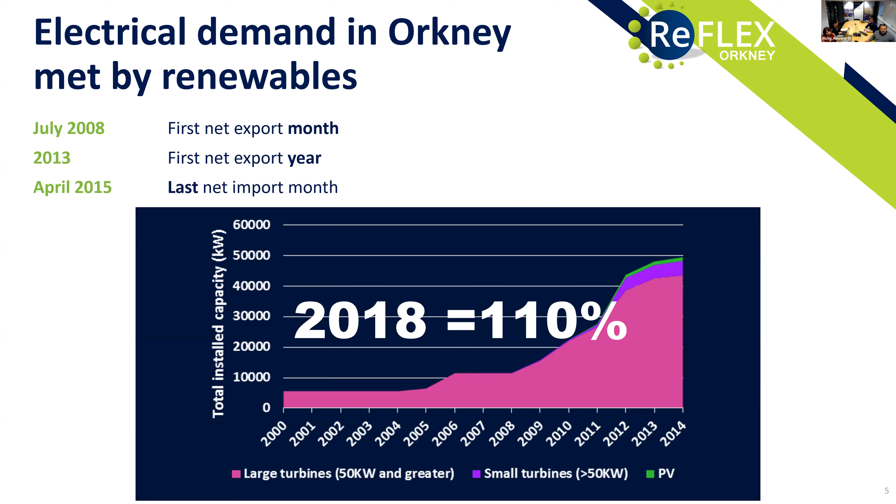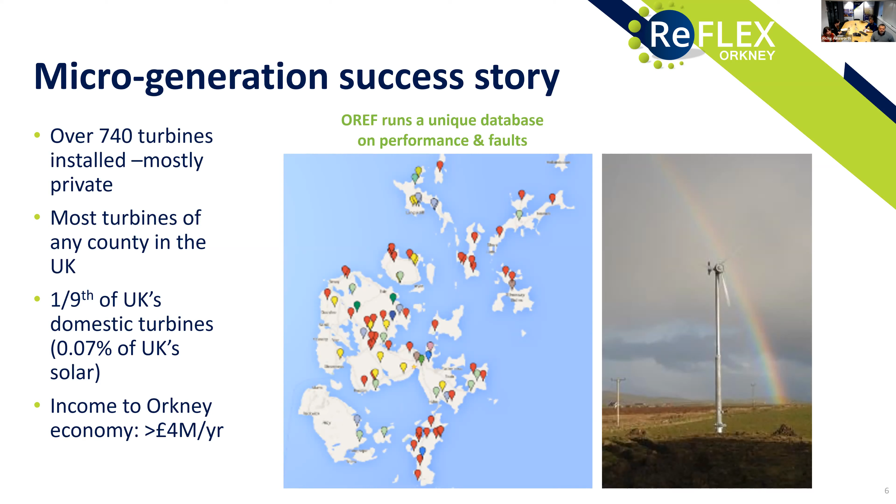But this journey has not just been about big-scale wind, it's also involved small-scale wind. Over the last 10 years, we've had 740 micro wind turbines installed across the islands. And this is mainly on the basis of a feed-in tariff regime which existed in the early part of the last decade. And not only has this given us renewable energy to households and farms, it's also given us income into the community as well.

As well as generating energy, we also use energy in imaginative ways, and the adoption of electric vehicles is one example. We now have over 220 vehicles in the county. We also have buses and other infrastructure associated with that. And this influx of electric vehicles has allowed us to gather data from that community to see how they're used and to think about how we could further decarbonise vehicle transport in the future. Again, we'll come back to that when we talk about ReFLEX.

Some interesting statistics there is that a vehicle in Orkney on average travels about 24 miles a day, and the average speed is around 30 miles per hour when the cars are in use, which takes about 1 hour per day.

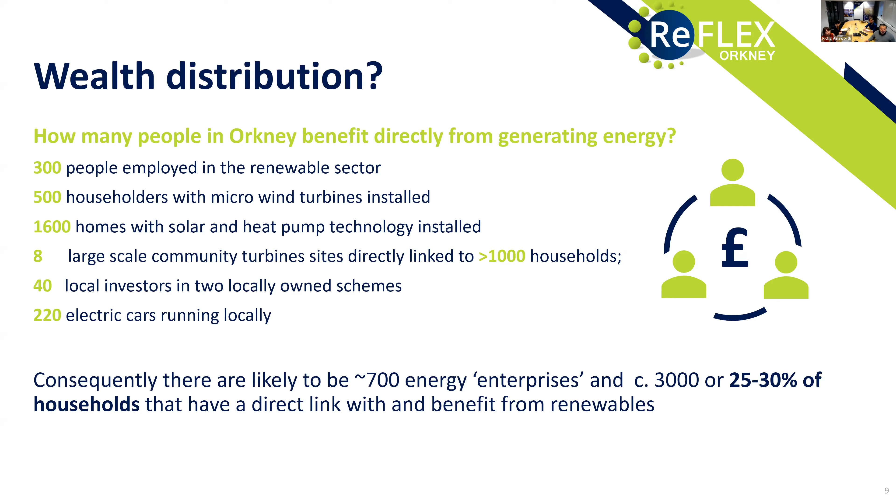So within any community, there's an important question about who benefits from these initiatives. And from the outset, Orkney has been very keen to make sure that as many people as possible benefit from the renewable energy revolution that's going on. What you can see here are some of the numbers that indicate how people are involved. Some people might have jobs, some people might be hosts to technology, others might be investors in schemes. But overall, we think that around 3,000 of our 10,000 households have a direct link and benefit from renewables, and that's about 25 to 30% of those households.

interestingly, that tomorrow for the UK is exactly what Orkney looks like now. Because we have 100% of our electricity coming from renewable energy, you can see here that when the wind blows strongly, we generate a tremendous amount of energy. And then when that goes away, we need to have solutions that allow for that demand to be met in the periods of less generation. So effectively, we're a living laboratory in Orkney for what the future energy system might look like.

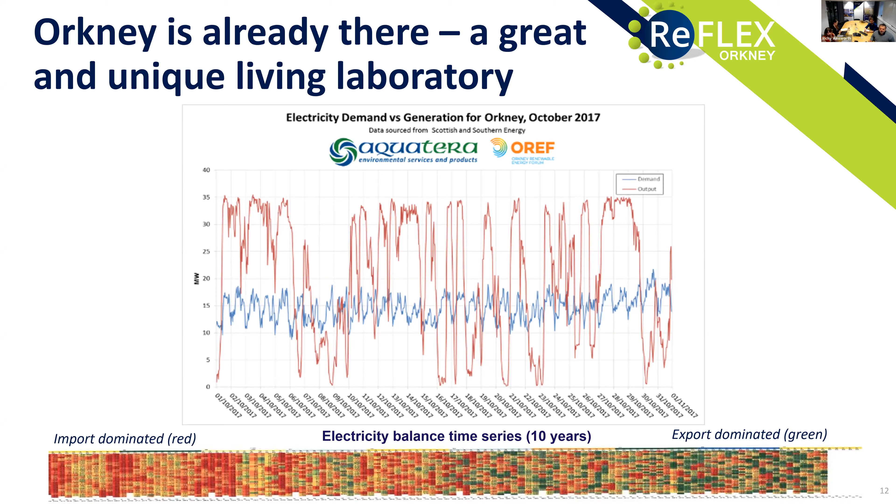And the transition that we've gone on over the last 10 years can be seen at the bottom. Now, if you look at this graph, which shows on any particular day whether we've imported energy in red or exported electricity in green, what you can see is that over the 10 years, we've moved from an import-dominated situation to an export-dominated situation.

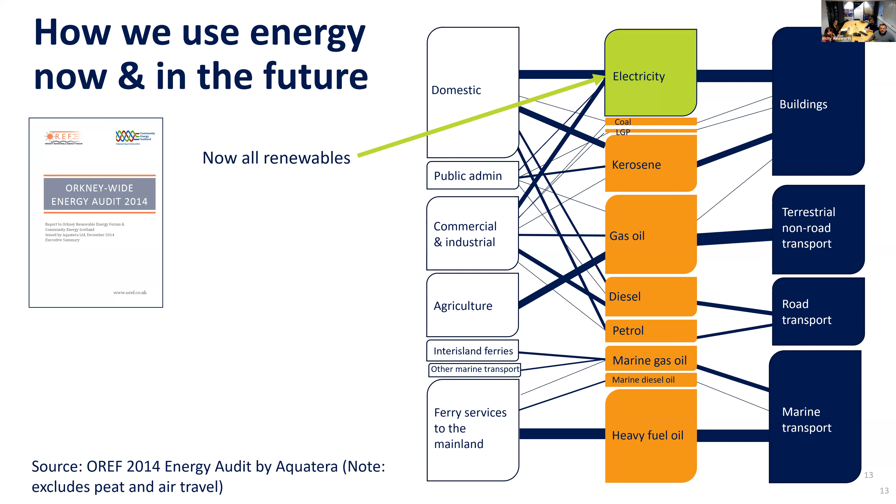So effectively, what we've talked about there is the decarbonisation of electricity. But this Sankey diagram shows in proportion our whole energy stack. And what you can see is that electricity is only about 15 to 20% of our total energy demand. So our huge challenge now is to decarbonize the rest of this stack through further electrification, through the adoption of hydrogen and synthetic fuels and other solutions.

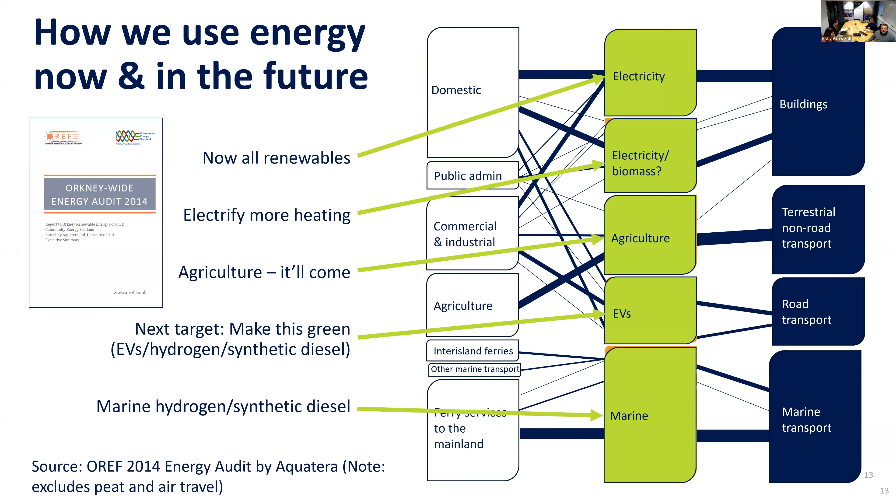So what we're going to be talking about for a lot of this presentation is how we're going about decarbonizing these other aspects of our energy system. And underpinning that is also the timeline, the target of when we're going to achieve that. So in the UK recently, we've had the government announce that they want to have a carbon neutral situation by 2050. In Scotland, the government has suggested that they want to be carbon neutral by 2045.

But the challenge for all of these targets is that somewhere needs to go first. We need a community that can adopt decarbonisation and then show others how to do that. And so Orkney is setting itself up to achieve this target of carbon neutral by 2030. And that's an important stepping stone then for other communities to follow. And this isn't just electricity, this is the whole energy system.

So underpinning this drive is a project called ReFLEX. And this ReFLEX project aims to use digital capacity to link the renewable generation to flexible demand. And by increasing the flexibility in demand, it allows the peaks and troughs to be evened out and for variable renewable energy to meet and match that demand. And what we're going to be doing is replicating that system across different communities in an integrated way across electricity, transport and heat.

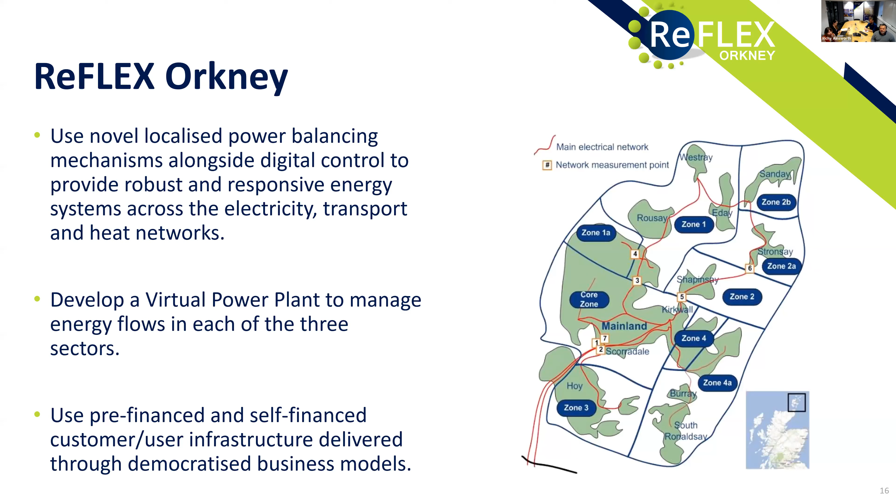So within Orkney, we have long had constrained energy generation because of the weakness of our grid system. And so these localized power balancing mechanisms will help us control that. At the heart of it is a virtual power plant, which Liam's going to speak to next. And another important part of this system is that the technology is going to be pre-financed so that the customer can rent or lease technology rather than having to buy technology.

And the team involved in that includes a number of the businesses that are here today, organizations that are here today. So we've got EMEC, Solo, Aquatera, and Orkney Islands Council, but also Community Energy Scotland, Heriot-Watt University, and Doosan, the Korean engineering company. And these organizations are then supported by others and associated partners helping make the ReFLEX team.

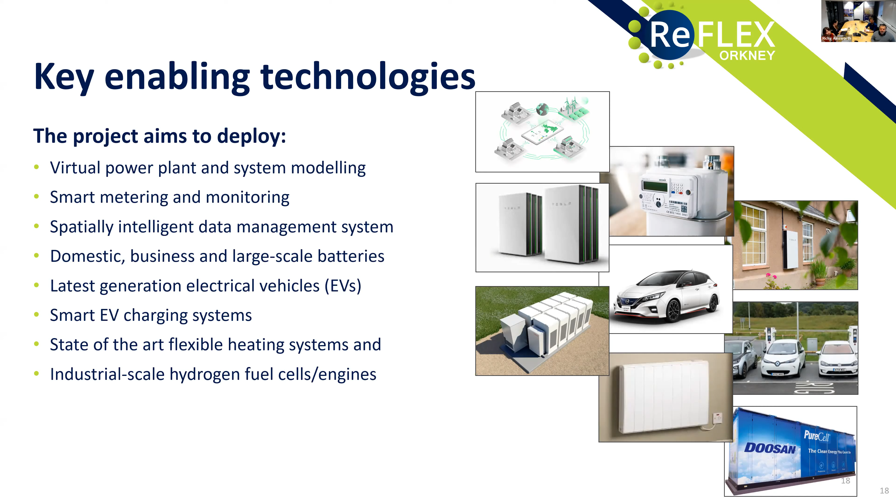So the key enabling technologies that we're going to deliver are the virtual power plant. Again, Liam will speak a bit more about this with the smart metering and monitoring. We're also going to be looking at domestic, business and large scale batteries. We're going to be looking to lease and provide for rental electric vehicles. We're going to have smart charging systems associated with that, flexible state-of-the-art heating systems, and industrial scale hydrogen fuel cells and engines. So I'll pass on to Liam to explain a bit more about the details.

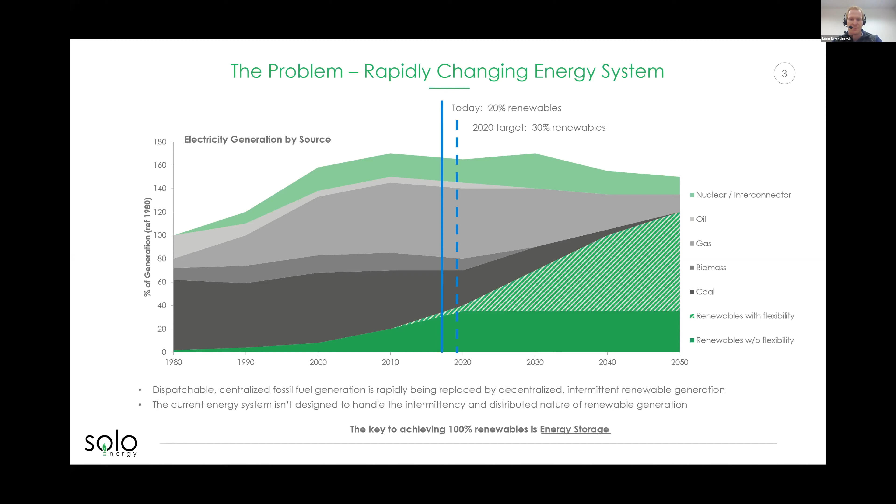And what we're doing in the ReFLEX project is addressing that flexibility and storage element across three vectors of the energy system. So that's power, transport, and heat. So the ReFLEX customer offer, the offer to the end consumer, whether they be residential or commercial premises or business, incorporates a power element in terms of 100% renewable local energy supply, a low-cost EV leasing model to address the transport network, and renewable heating retrofits to address the heat side of things.

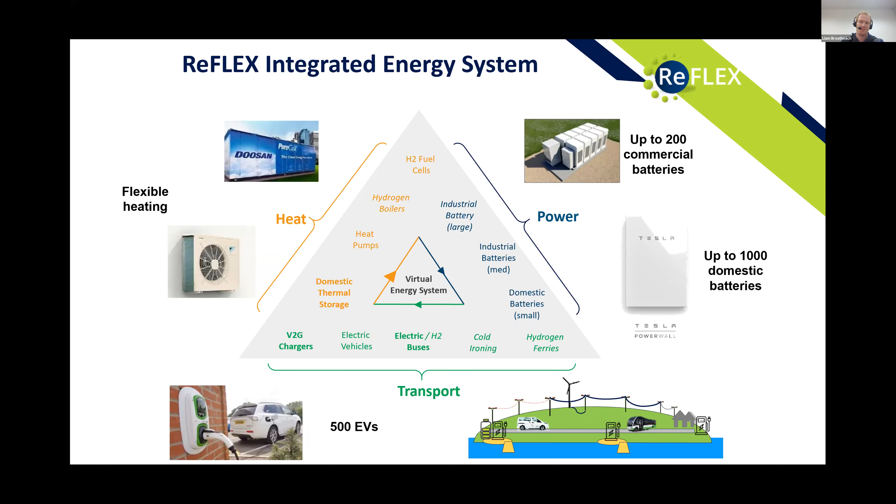And where do Solo as a company come into this? So our model is effectively to offer customers batteries, EV chargers, and other flexibility assets installed in their homes for free at no upfront cost to them. We control those assets to optimize their behavior and deliver benefits to the end consumer, to the grid, to the system operators of the grid, and also to energy suppliers.

And we do that by operating those systems as a virtual power plant. So effectively, we take a large number of small distributed assets and operate them together to mimic what a traditional power plant would have done. And that gives us a lot of flexibility in terms of how we operate.

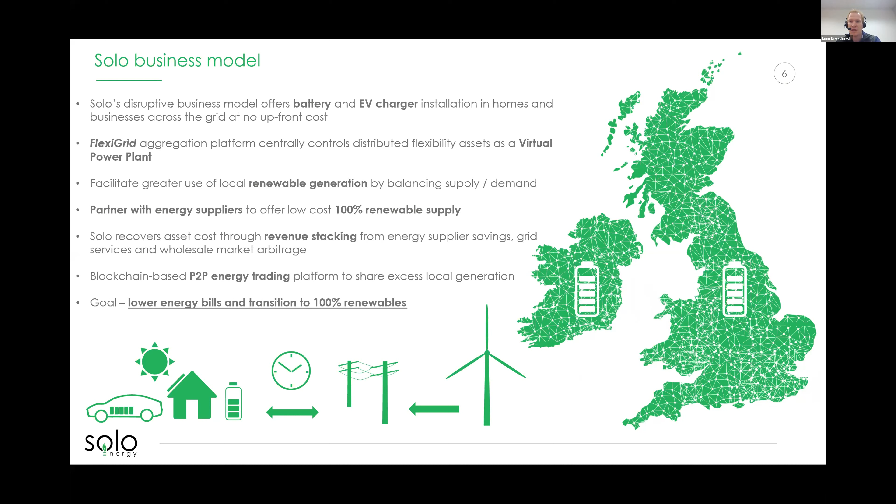The reason why we do this is to facilitate greater use of local renewable generation, to help balance supply and demand on the grid, and obviously to deliver benefits in terms of savings to the end consumer. So as I mentioned, we partner with energy suppliers to offer that 100% renewable supply, and we recover the cost of the assets that we financed through revenue stacking. So we access various different markets, such as balancing services to system operators, such as reducing peak charges for consumers.

So this is what our USP is. It's our FlexiGrid platform. Essentially, it's a cloud-based platform that controls multiple assets across the grid. So it brings back data from each site, and that data can be from an electric vehicle charger, for example, a residential battery, a commercial battery, or a heat pump. Brings it up into the cloud. We undertake some data analytics.

We take in various different signals, whether they be from system operators or even weather forecasts, for example, and we determine how to optimally operate that asset. And then we push out control signals to each of those sites. And the control signals can be as simple as, for example, charge a battery now, or stop charging your EV. But the key point is that there's a great degree of optionality in having so many assets of different types within the virtual power plant.

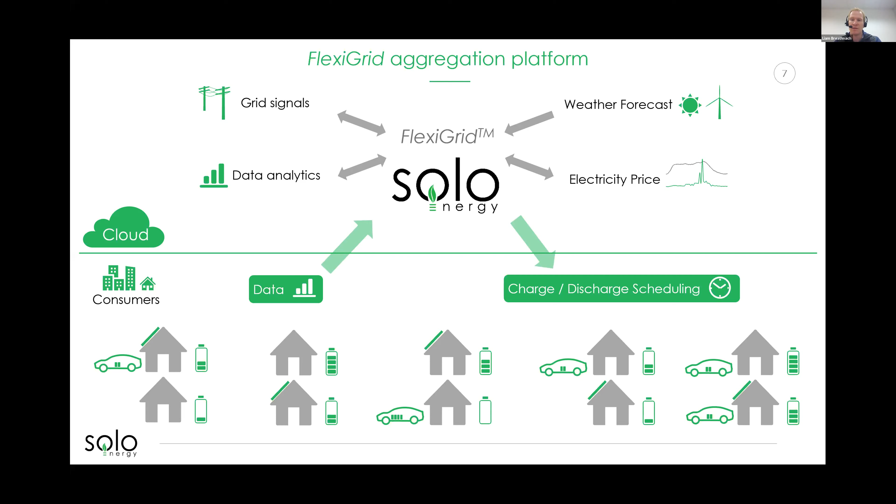The wholesale electricity price tends to follow that pattern, so it's generally low during nighttime when demand is low, and then we see a nice spike in the evening. That spike is generally driven by the fact that balancing costs are higher, but also you're bringing on more and more generation, and that generation you're bringing on tends to be of reduced efficiency, so it's costlier to run.

Traditionally, because demand couldn't be controlled, this has been a very one-way system. Price follows demand, but having the flexibility assets rolled out across the grid and control of those flexibility assets means there's an opportunity here. For example, let's say you charge a large number of batteries at off-peak times, you can potentially reduce demand on the system during those peak times.

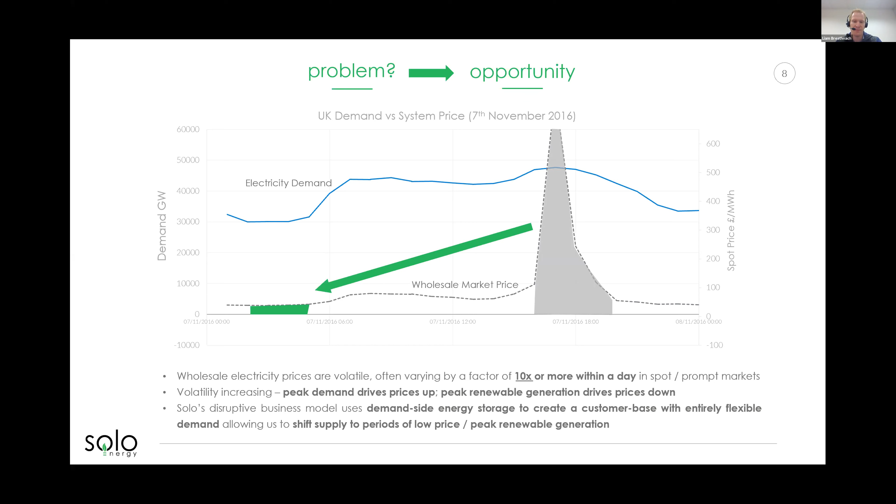We're also seeing some very interesting developments in recent years in the UK, but also in wider European markets, that we're seeing negative wholesale prices. So this generally occurs when you've a lot of generation, renewable generation on the system. So for example, it's a particularly windy day and you have a lot of wind on the system.

And why you might see a negative price is that it's actually costlier for a lot of the traditional generation plants to actually switch off. So they'll actually pay a certain figure to stay connected to the grid and producing, so they don't have to switch off the generation and come back on. And that absolutely presents a significant opportunity if you're controlling electric vehicle charging, or controlling batteries, for example, and other heating elements.

Wind and solar plays a significant role, obviously, in the variability of the system, but not even so much the actual total amount, but also forecast versus actual. So there's inherent uncertainty as we go to a greater degree of renewable generation on the system. And it's important to address that uncertainty with increasing flexibility on the system.

And so there's the traditional options where thermal generation plant have provided that flexibility to system operators, but now we're moving to a stage where every home, every business could have a flexibility asset within it. And it's the control of those assets that is a key enabler for an increased renewable generation across the system.

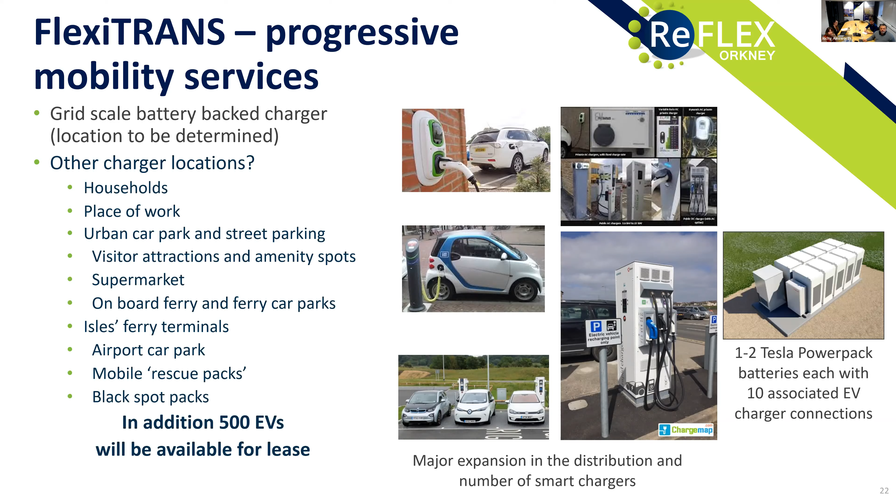So what I'm going to do now, I think, is hand over to Richie and Adele, who are going to talk a bit more about hydrogen, and then I'll come back and talk about how that links into the heating system in Orkney as well.

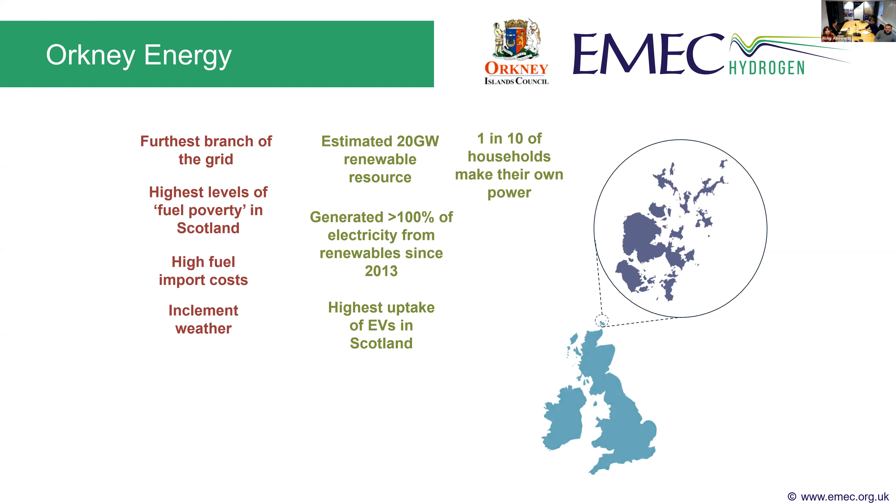In recent years, the Orkney Sustainable Energy Strategy has been launched, and personally, I find one of the most crucial things to the success story of Orkney is the community's engagement and the fact that everybody is able to get on board with this. A lot of people locally really understand their energy needs, and I just don't really see that in other areas. I guess that could be the same for other islanded nations that are tuning in as well. And we've got great organisations such as the Orkney Renewable Energy Forum, which gives the community a platform to raise their concerns and discuss all the issues so we can find solutions together.

Our main issue at the moment though is our export constraint. So even though we have this huge renewable resource surrounding us, we are limited in the amount of energy that we can get off Orkney or import if we were wanting to.

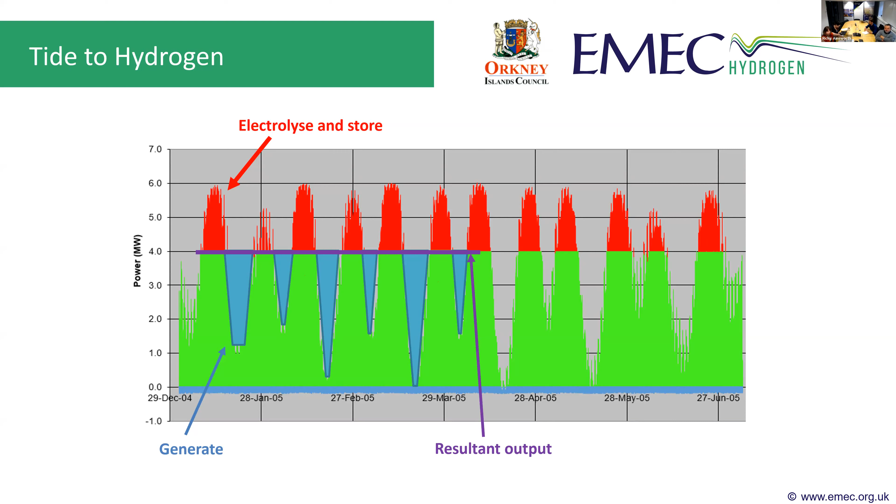So what had happened was we reached a point of saturation on the local grid, and there was a memorandum put in place that we were not able to install any more wind generation on Orkney. There was a piece of work done that generated the UK's first active network management system. This is a software system that essentially allowed an extra 20 megawatts of generation to be added to Orkney's grid, but it effectively allows generators to be told when to turn off. If we're going to be producing too much electricity, we can send them a signal and they're able to shut down. Unfortunately, those levels of curtailment are quite a bit higher than we've expected.

And the turbine that we're showing there, they actually experienced curtailment of 50 to 60% of times that it could be generating. This is obviously a loss of funds to the local community because they're losing their feed-in tariffs that they should be getting paid. But overall, it's just a waste of renewable energy that we could be capturing. So as well as the tidal energy on our site, we're also looking at capturing wind, turning that into green hydrogen, and finding uses for that. That led us over to the Surf and Turf project and collaborating with Adele and everybody else over at the council.

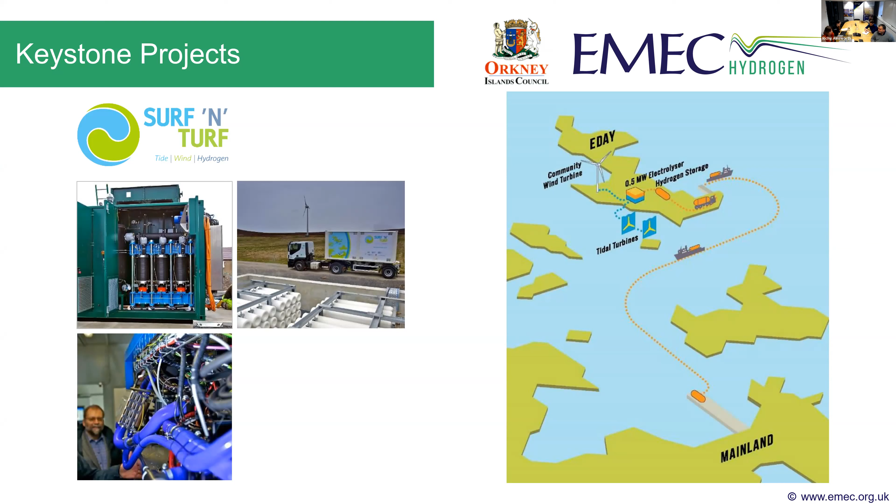And that project was funded by the Scottish Government to a roughly £3 million budget, so it's a significant investment for Orkney. And then building on the Surf and Turf project, we thought we could take that a little bit further. As well as using the hydrogen back for power, and I should say the power is used to power vessels here, ferries, when they are dockside. Previously they would have plugged into the grid, or they would have used fossil fuels to do that. So now we can use the hydrogen to generate the power for that, taking off a bit of the carbon from the system here.

Great. So basically the BIG HIT project, which is an EU funded project, roughly €7.5 million for Orkney as well, expanded on those principles. So we added a few more trailers. We also added a 1 megawatt electrolyser on the second island of Shapinsay. And again, that is a community wind turbine. Slightly lower rates of curtailment than Eday, but still, it can be anywhere from 15 to 40% on Shapinsay there.

As well as using the hydrogen for power generation, in the BIG HIT project, we use the hydrogen for transport. So you can see we have some vans down here, hydrogen electric vans that we have purchased as a local authority and integrated into our fleet. So we have transport, and then we've also added 30 kilowatts of hydrogen catalytic boilers into a local primary school. So that neatly starts to demonstrate the heat, the power, and the transport aspects that hydrogen can address. So it's kind of like Surf and Turf 2.

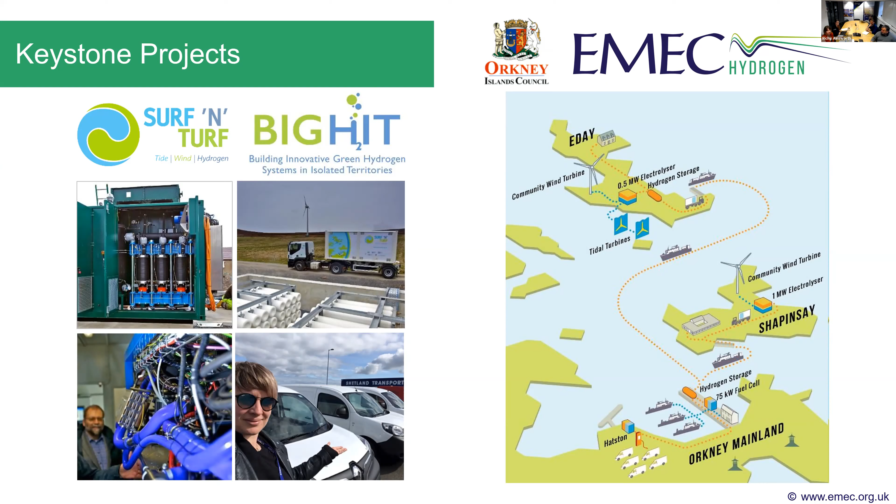What's the most suitable for us? What regulation, what barriers have popped up on the way? And then really testing this kit. So testing the van, testing the boilers, testing the trailers, to see what works and what doesn't work really. So that's been the kind of main learning points for the project so far, I would say.

Just to get it out there, I think that partnerships have been instrumental in the success of all these projects. So I think it's safe to say that the renewable scene in Orkney, the continuing development of that renewable scene, is very much bottom up. It's local companies, local communities, local people, individuals, farmers, realizing that renewable technologies are able to benefit their

day-to-day life in some sort of manner, and it's really formalizing these groups and linking the groups together, and submitting these funding applications from this point of partnership that's really helped us move it forward and propagate the results in other regions as well.

So in terms of Big Hit, 12 partners from 6 European countries, and the projects that we're seeing moving forwards are even more partners than that, double, triple the number of partners and many more regions in Europe. So each area brings its own kind of expertise, and that really has helped us build these very rounded projects, I feel.

And there you can just get a kind of closer look at some of the kit that we have. So yeah, very interesting tourist attraction they've become, business tourism as well as day-to-day life. So people love to come and see the kit that's on the ground. So it's moving from this kind of theory-based project into putting actual kit down and learning in a harsh weather environment, I think it's safe to say.

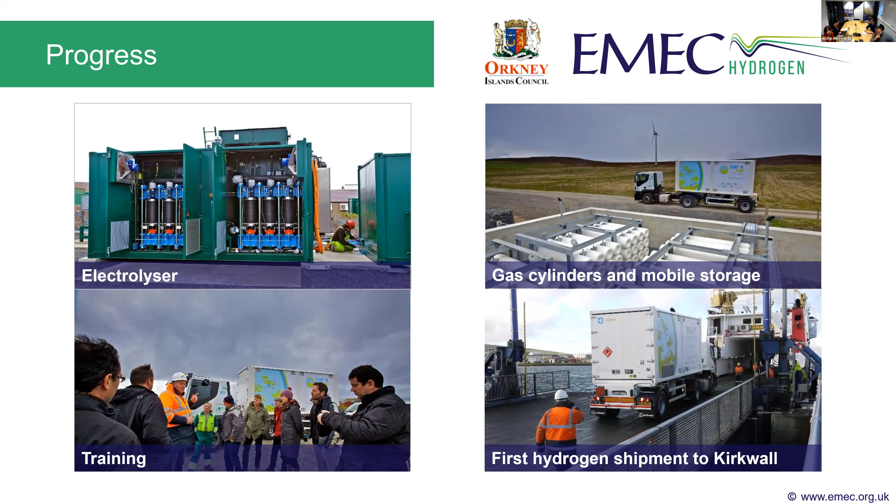So you can see some of our milestones. And from these projects, as a community in Orkney, so not just from the local authority, we thought there was a need to start looping some of those strands together and giving the hydrogen movement in Orkney a bit more direction moving forwards, and really how we can capitalise on what we've done so far as we see more communities kind of moving towards the hydrogen space when they're trying to balance their renewable integration, basically.

So we came up with some principles there, which we think are broadly representative of what we would like to achieve. The main thing really is green hydrogen production, and that's a really important one for us. But this just transition as well of how we move skills from traditional industries into the more modern industries, like Gareth mentioned. There's hundreds of jobs in renewables, and there weren't many engineering courses in renewables when they started taking on those jobs.

So we're seeing that transition now of more education popping up specifically for renewables. But prior to that, it's been this transition of traditional skills into the new kind of industries, really, and then continuing to promote this lab atmosphere of innovative research and this collaborative approach to partnership when moving forwards with the project. So that was the idea behind our hydrogen strategy.

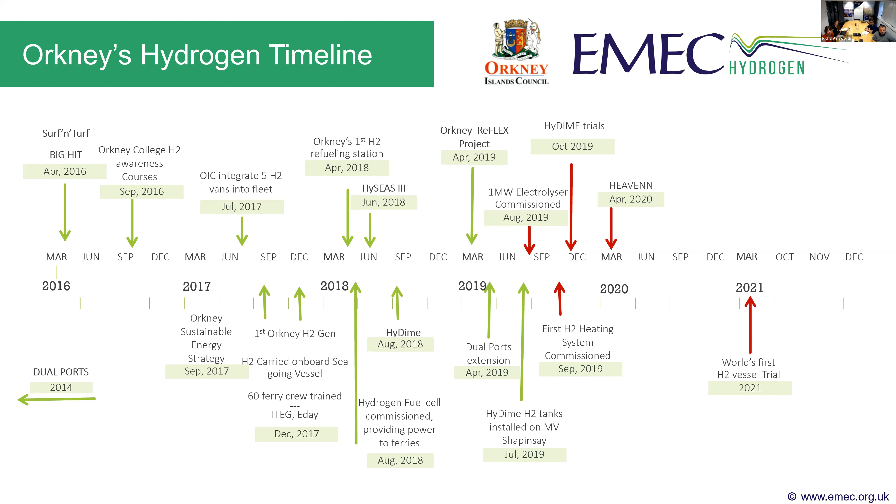So the data here was just kind of building upon that base of knowledge that we've developed as a region to allow us to make much more informed decisions about where we would like to go moving forwards. Bear in mind that we very much see hydrogen, of course, integrating with what electricity can do. If you can use electricity in the first instance, yes, you would do that.

But there are going to be areas where we're going to need the storage basically, but where consumer expectation may not be met by electricity, or any behavioural issues that can be neatly transitioned into a carbon-free alternative. That's really where hydrogen would come in, as well as the heavy uses like your ferries, like your road transport over multiple miles and things like that. So that's really where we see hydrogen going for Orkney in the future.

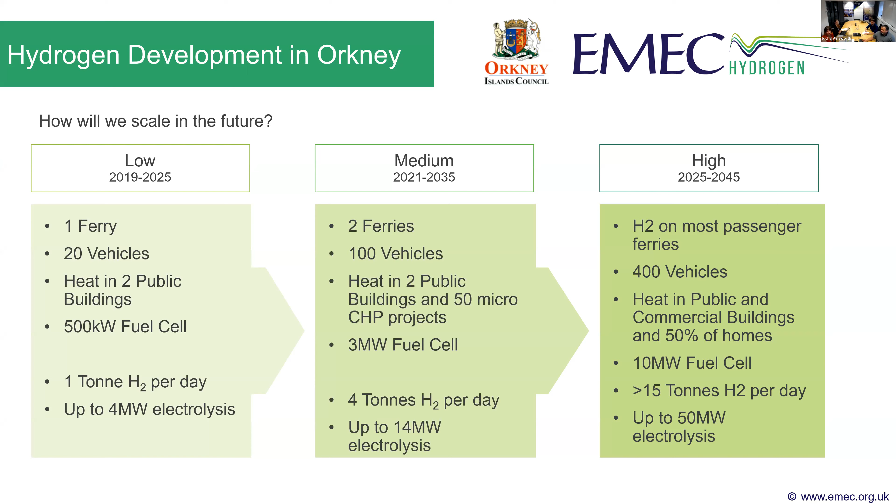And we haven't really started to address heat in anger either, and that's a massive government target. We've got, like we said, fuel poverty, so hopefully we'll be moving into that heating aspect in the very near future as well. And then I'll pass you back over to Richie.

Yeah, so just to reinforce those projects, for us in Orkney, it's all about energy resilience. It's the recognition that we want to capture potentially wasted renewable energy resources around us, but also the recognition that we're not going to be able to do absolutely everything with renewable electricity and electrons. So that's why we're really keen on looking at green hydrogen and where we can spread that out across different projects. So currently we're working on stuff with ferries.

As Adele mentioned, we've got the fuel cell, which is looking at supplying power to the ports. We're looking at hydrogen boilers, which was a part of the Big Hit project, also just linking into the heating aspect there. A lot of our projects are focused on transport, going for the lower hanging fruit, as it were, but there's a big part of the ReFLEX project which is specifically looking at green hydrogen to be used in a combined heat and power unit for one of the big energy users on Orkney.

We also have an aviation project underway at the moment that hopes to have a green hydrogen powered aircraft testing in Orkney by the end of 2020. And a big one for us that we're involved in is looking at the distillery sector as well. There's a lot of push. We mentioned ecotourism, but the more people are aware of their energy use and their consumption needs, you can see this light bulb moment for a lot of people, that they want to know where their energy comes from, that their products are coming from sustainable sources.

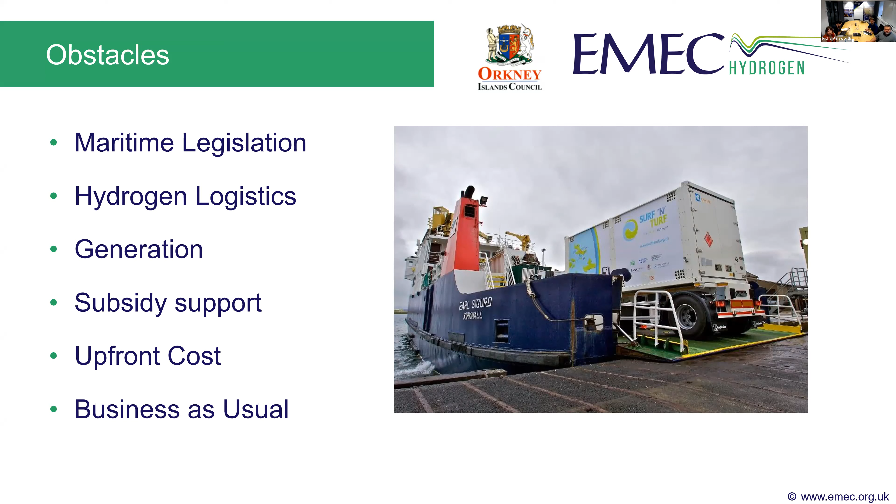We do have the fact that we are generating hydrogen in a remote location. That makes hydrogen logistics very complicated. As Adele mentioned, we have bespoke trailers for moving our hydrogen around. This is all great learning that we can pass on to other people. And yeah, our generation at the moment is remote, but we're looking at moving that into a more centralised location. There is a lot of subsidy support out there.

For the UK, the Department for Transport last year allowed renewable hydrogen to be included in the Renewable Transport Fuel Obligation. So you can actually get subsidy credits if you're using green hydrogen in your vehicles, like the council are doing with the Kangoo vans. We're lobbying for this to be extended so it can include aviation transport and ferries as well, and we hope for that to happen in 2021.

Overall, the main obstacle is just upfront cost. These are all cutting edge technologies. Price is coming down, but we're still quite far away from making it a commercially viable offering. And I think there's so much critical learning that needs to happen. And as Adele mentioned, so much of that coming from collaboration has been fantastic, because we can't just carry on

with business as usual. Professor Sir David King, who was chief scientist for the government before starting the Cambridge University Centre for Climate Repair, said a few months ago, what we do over the next 10 years will determine the future for the next 10,000. So I think that's quite a poignant note to end our talk on, and I'm hoping that green hydrogen and our work up in Orkney is going to be able to feed into that.

Brilliant. Thank you very much, Richie and Adele. So just before we move on to Gareth's final presentation, there are quite a few questions coming in. Now, I think some of these questions have already been answered in the presentation, so I'm going to focus on the ones that I don't feel have been quite answered yet, but we will try and get an answer to everyone following the session today.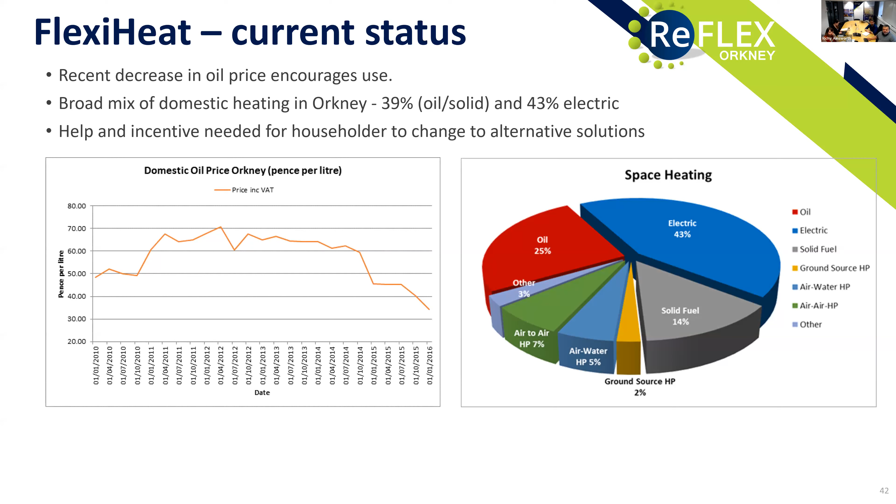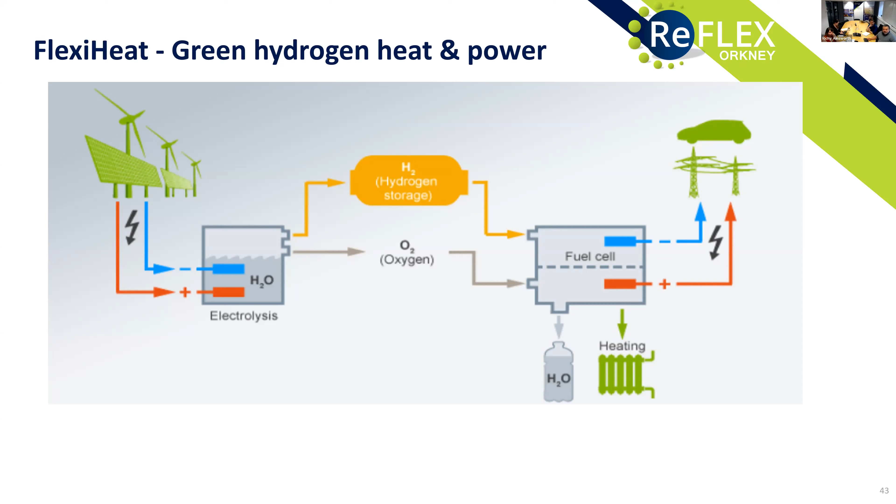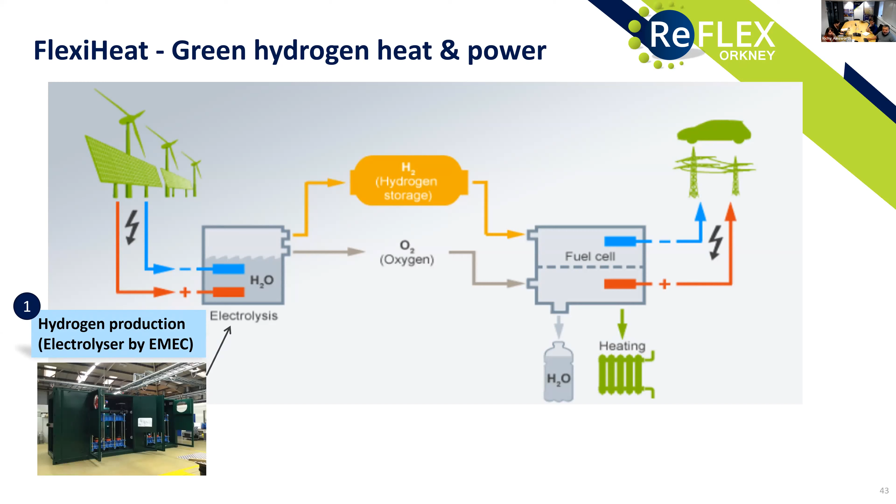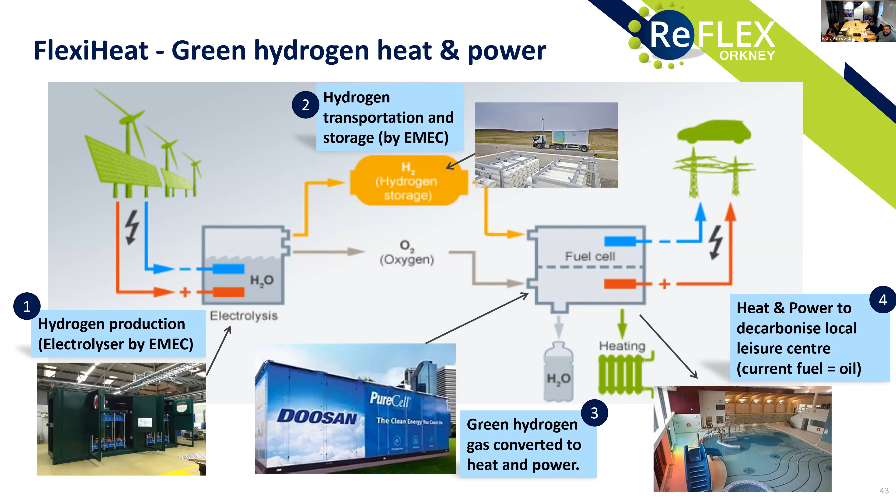As well as looking at household energy, we're looking at public building energy, and this is a system that we're going to be putting into a local leisure centre. On the back of the hydrogen production that you saw from Richard and Adele, we're going to be getting gaseous hydrogen brought to a site in Kirkwall, where it's going to be converted to heat and power, either through a fuel cell or a hydrogen engine. Richard was alluding to the fact that that technology is emerging now, and that heat and power will be used to maintain the swimming pool and other leisure facilities going forward.

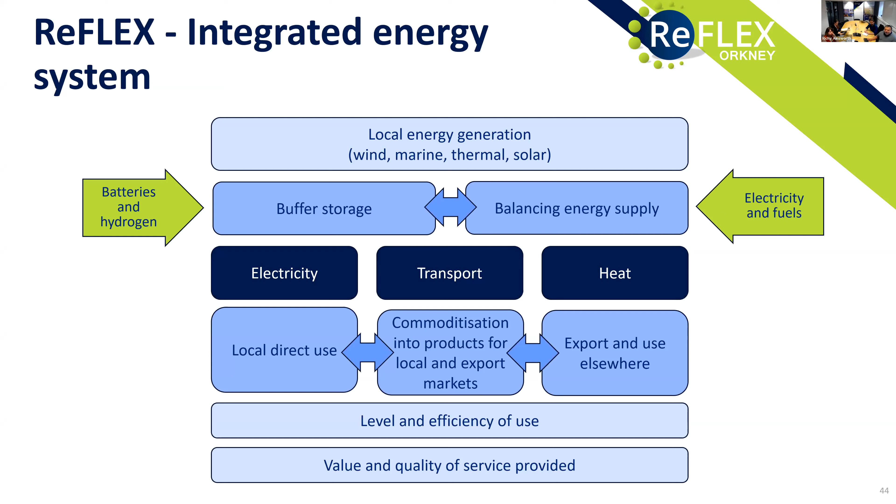So basically the question then for ReFLEX is, okay, these are great technical solutions, but how are we going to manage and organize all of these things? And so what we've identified is that we need a 2-tier company setup basically to do that. So we want to trade locally and trade globally in financed energy services.

So what we envisage is having what we call ReFLEX Global, which is an umbrella commercial vehicle, and the solutions and the ideas that are coming out of the ReFLEX project will feed into that ReFLEX Global entity. And then those findings will be able to be shared not only with Orkney, which will be our first local trading company, but also with other geographies across the UK and across the world.

And what we're looking to do is, by having a robust and comprehensive business case for this new kind of energy system, to be able to attract major investment into the ReFLEX Global umbrella, so that there's funding available to cascade down to the local energy companies.

And at a local level, we're looking to reach out to local authorities, local governments, local people, local businesses, to see if they would like to co-invest at that lower level in the local energy companies, so that we end up with a twin track approach of embracing global finance might with local finance capacity as well.